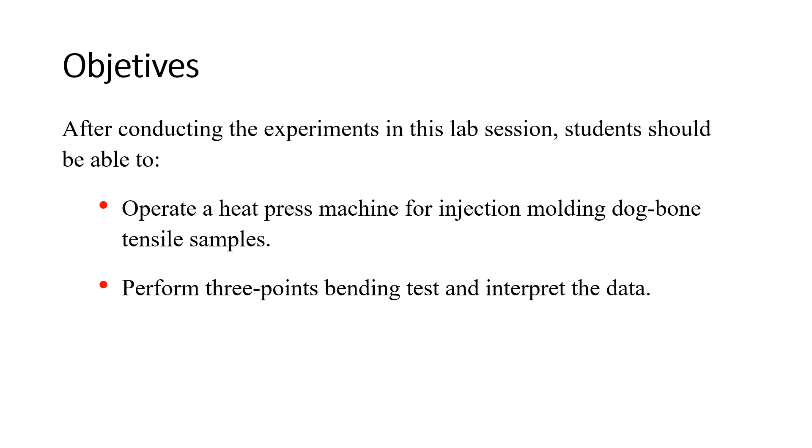Topic A, Experiment 2: Injection Molding and Bending Test. Objectives: operate a heat press machine for injection molding dog bone tensile samples, perform a 3-point bending test, and interpret the data.

By observing the behaviors and analyzing the data, students will learn the comparison between the tensile and bending strengths, and the time-dependent deformation behavior of the material.

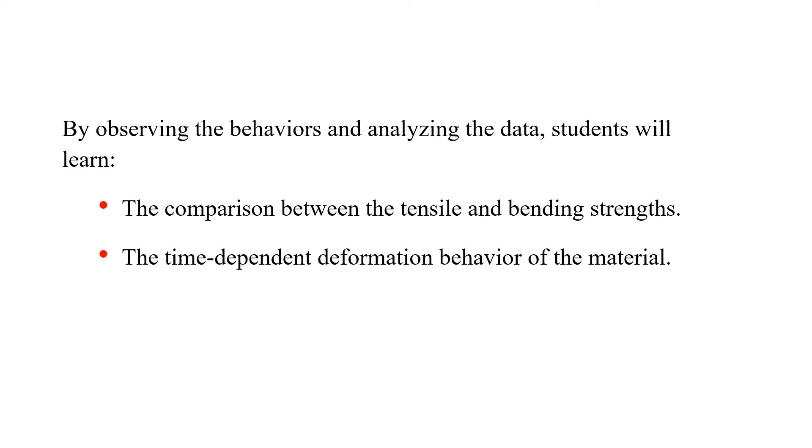The correct amount of pelletized material is fed from a feed hopper into a cylinder by the motion of a plunger or ram. The material is pushed forward into a heating chamber to melt and form a viscous liquid.

Next, the molten plastic is impelled through a nozzle into the enclosed mold cavity. The pressure is maintained until the molding has solidified. Finally, the mold is opened, the piece is ejected, and the process is complete.

Examples of thermoplastics are ABS, polyethylene, and PVC. These materials have unique chemical properties that let them be remolded and recycled without negatively affecting their physical properties, making them ideal for injection molding.

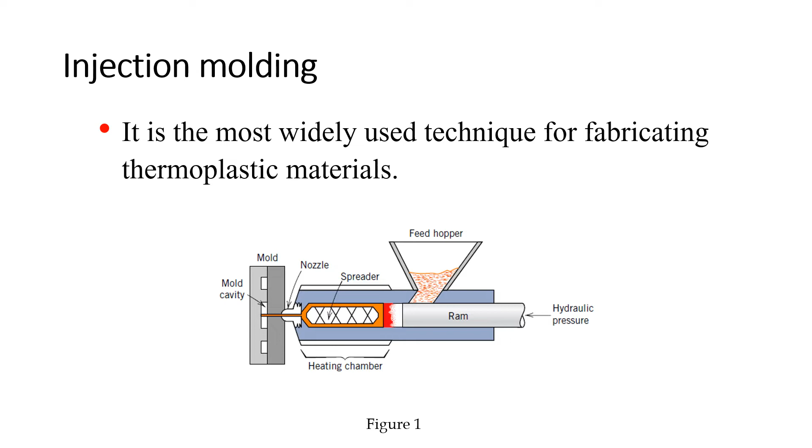3-point bending test. This is a classical experiment in mechanics used to measure the Young's modulus and the deflection strength of a material. The beam specimen is loaded in a simply supported condition with a point load at the center.

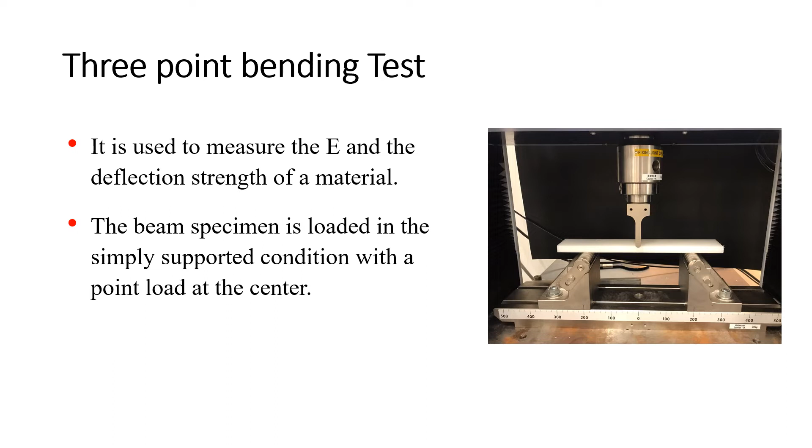To perform the experiment, the beam specimen is loaded in the simply supported condition with a point load at the center. The bending stress of the beam can be calculated as: 3PL over 2BH squared, where P is the point load, L is the span length between two supports, H is the height of the beam section, and B is the width of the beam section.

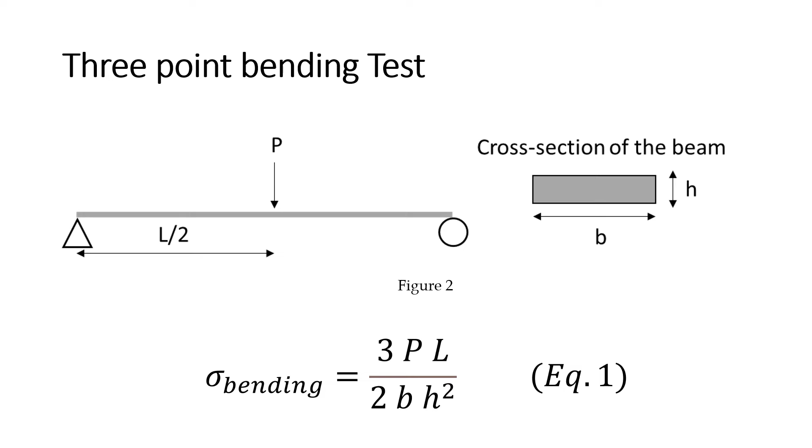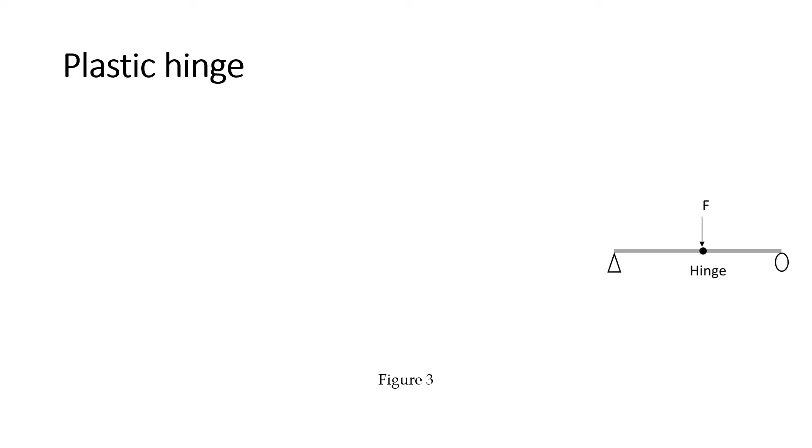Plastic hinge: for testing a ductile material using the 3-point bending test, forming a plastic hinge is one of the common failure mechanisms. When the beam is slightly loaded, it starts to bend with only elastic deformation over the cross-section. The stress distribution over the cross-section transitions from maximum compression at the upper face to maximum tension at the bottom face, with zero stress at the neutral axis.

This shape of the stress distribution over the cross-section is assumed when using equation 1 to calculate the bending stress. Later, when the load increases and the beam starts to undergo plastic deformation, materials close to the top and bottom faces start to yield. This causes the shape of the stress distribution to deviate from its original shape, making equation 1 overestimate the actual stress value.

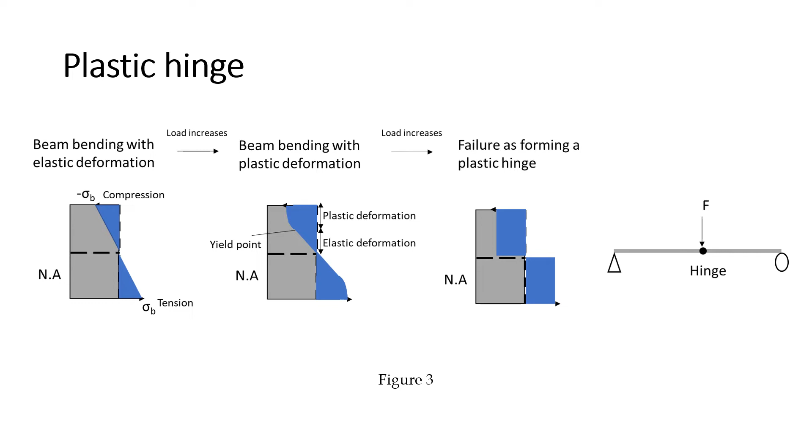Eventually, when the load gets high enough to make all the material over the cross-section yield, the entire cross-section starts to lose its stiffness and behaves like a hinge.

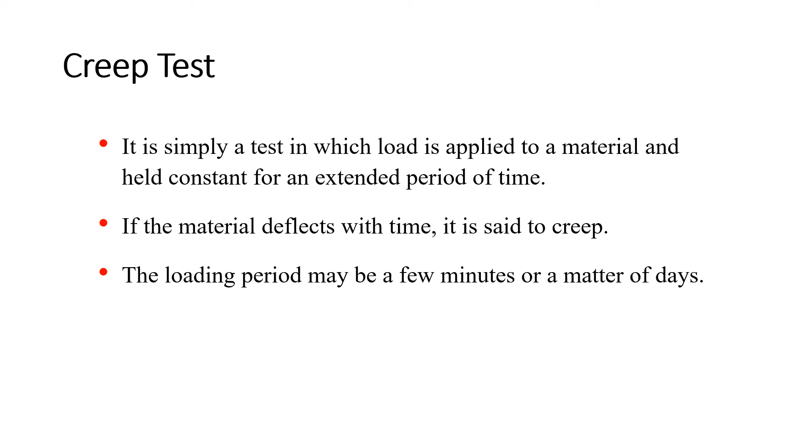Creep test: this is a simple test. Basically, a material is loaded for a long time. If the material deflects with time, it is said to creep. The loading period may be a few minutes or a matter of days.

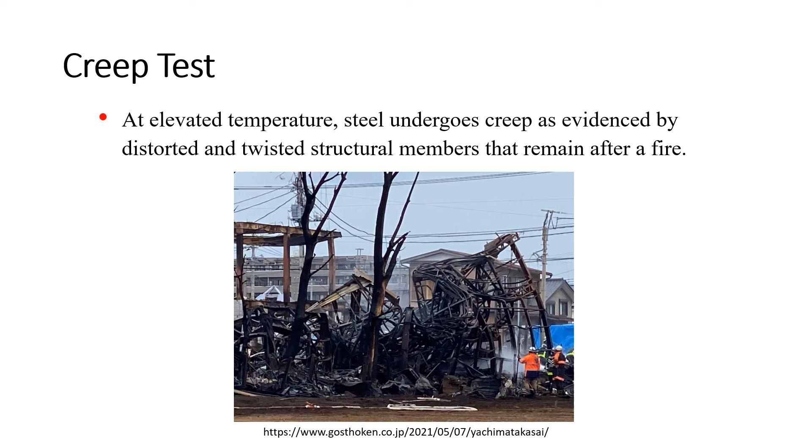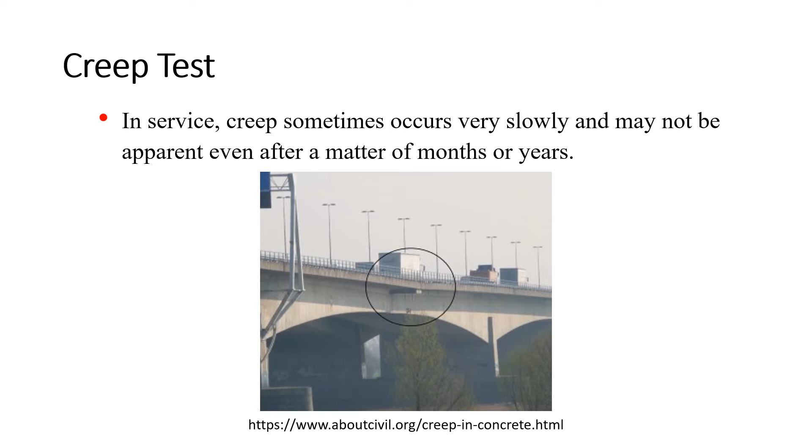At elevated temperatures, steel undergoes creep, as evidenced by distorted and twisted structural members that remain after a fire. In service, creep sometimes occurs very slowly and may not be apparent even after a matter of months or years. Don't forget that plastics are susceptible to creep, especially thermoplastics, when loaded above their glass transition temperatures.

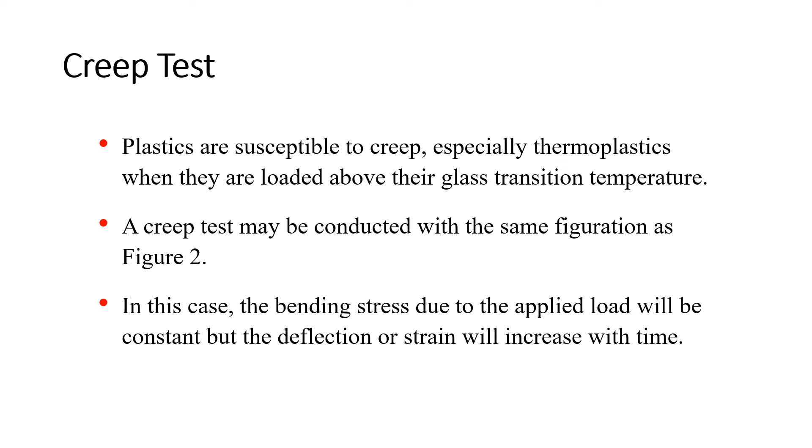A creep test may be conducted with the same configuration as Figure 2. In this case, the bending stress due to the applied load will be constant, but the deflection or strain will increase with time. We have mentioned time in our calculations.

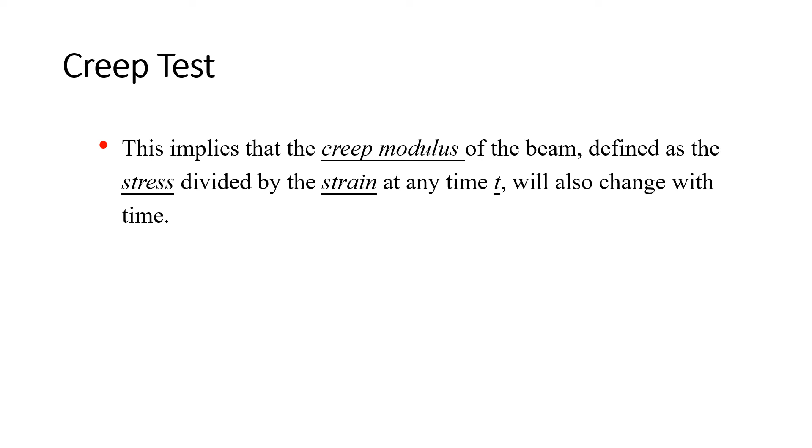Whenever an equation is a function of time, it obviously causes the result to change with time.

For an elastic beam, the longitudinal strain at the top and bottom of the beam is given by the equation shown here: 6 times delta-T-H over L squared, where epsilon is the longitudinal bending strain in the upper and lower faces of the beam as a function of time, and delta-T is the deflection of the beam as a function of time, with units in millimeters.

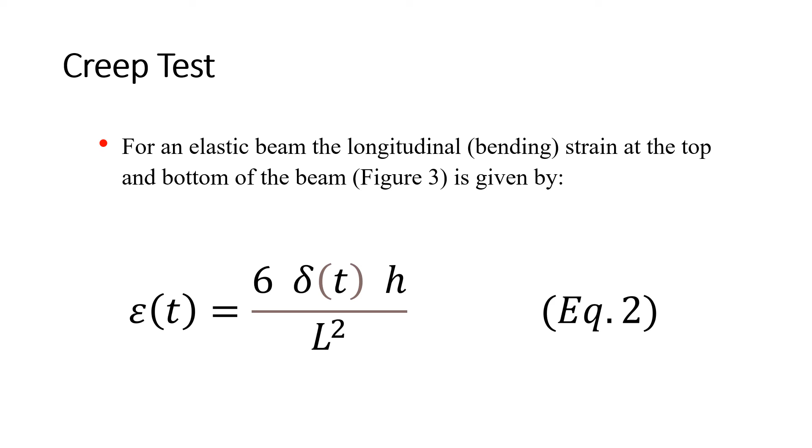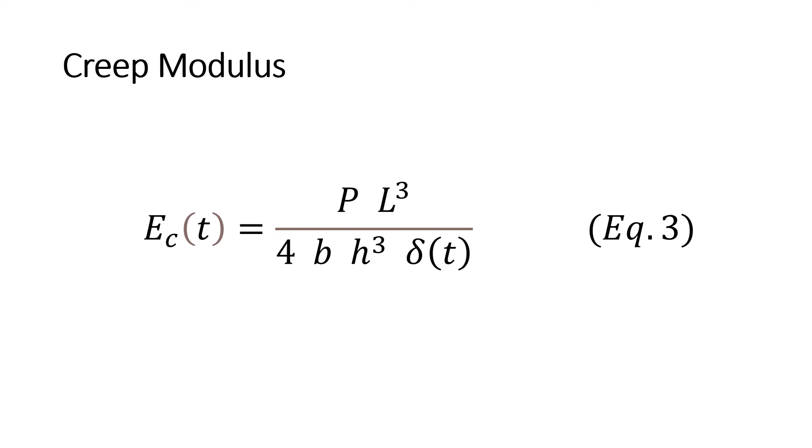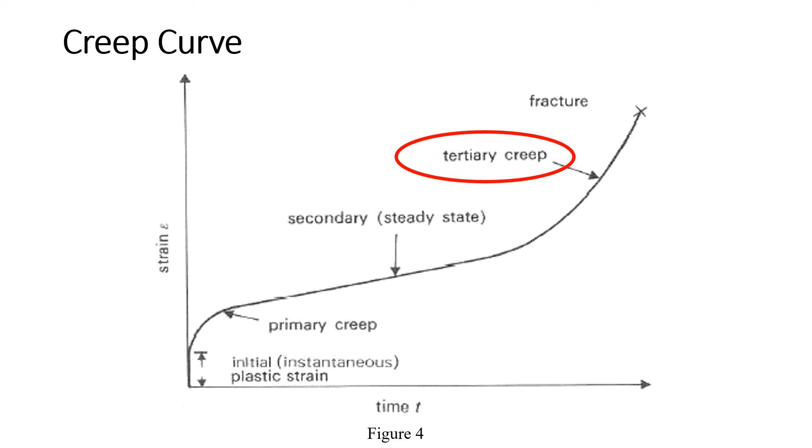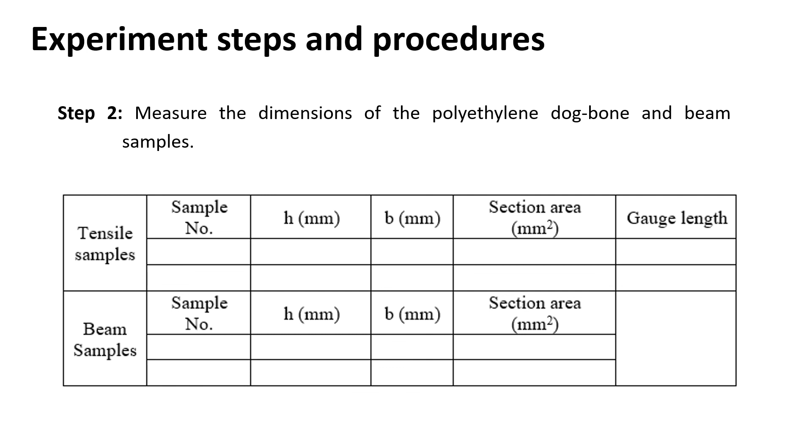Step 2: measure the dimensions of the polyethylene dog bone and beam samples. Step 3: perform the tensile test for the tensile samples and the 3-point bending test for the beam sample to measure the ultimate tensile strength and bending strength using equation 3.